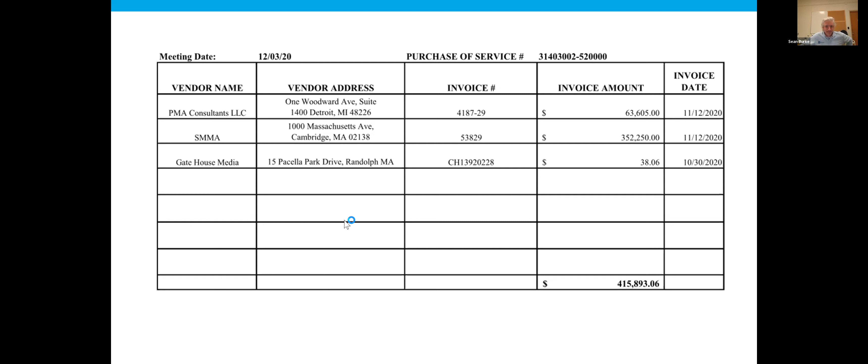Great. Does anyone have any questions for Sean? Hearing none, we'll move on to number 4, phasing review.

Okay, so Lorraine, do you want to go through this or do you want me to? I can open my screen, can people see this? You can open your screen, actually, Chris Racine is on here, so maybe Chris can. Oh, he's even better. Yep, I'll just start, if you don't mind, Chris, just giving an overview.

So after the last meeting, when we went through the construction schedule and we changed the occupancy date from the start of the school year 2022 to the start right after Christmas break of 2023, that changes a little bit of the site phasing.

Obviously, the building will be constructed. As designers and civil engineers, we need to, in the bid package, tell the contractor whereabouts on the site they can work during the various phases. It's critical during a time period when the Memorial Park School will be in occupancy, making sure we maintain parent drop-off, bus drop-off. But then we like to take advantage of what we call the summer slammer, where we'll actually take over the entire site, we'll move the fence, and do work outside of that fence for the 7 to 8 weeks. That is really truly what the summer period is.

And then we pull that fence back in again at the start of the next school year. So these diagrams are part of the bid package. They're critical so that the contractors are aware that they own both the moving of the fence and the work limits, and where they can work and where they can't.

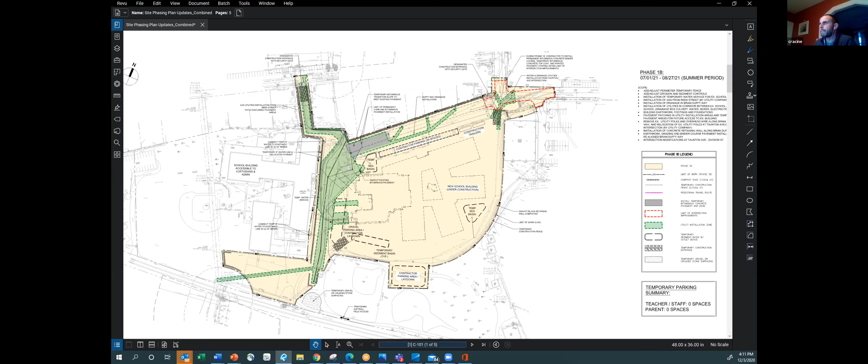It's getting pushed out closer to this north property line, so that roadway will be in place as binder course. The circulation is the same, it's just shifted up a little bit north now where Duffy Way has been completed.

This is one of the conversations we had today with Dr. Cron, just with limited turnaround, keeping the parent drop off inside the site over the striped islands, but keeping the buses out, which is a benefit, I think, to the project.

The Memorial Park School for this coming summer will essentially be offline. So we will need to relocate, for example, Linda Maniglia and her staff to the high school for the summer. We'll need to move Jan Sheehan and her staff to the high school or middle school over the summer so that the construction company has access to the building. The custodians will stay on site, but everyone else will be relocated. Just wanted to make sure everyone knew that.

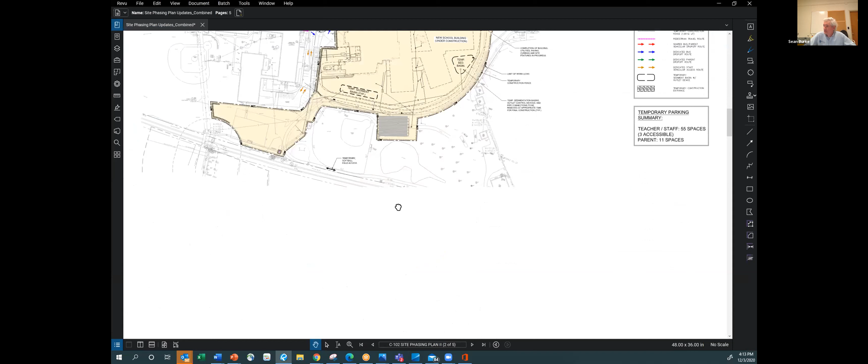So this will be the second summer slammer period. Again, the construction fence gets adjusted to be in front of the school, more space for the contractor. There'll be ongoing, continuing building work, continuing site utilities. They'll be starting to do more of the paving and curbing around the school, the walkways, the plazas, putting in light poles. And starting playground installation in this phase.

This is essentially about 2 months before substantial completion, so the building is weather tight. A lot of work going on inside the building at this point. They'll be tying in the rest of the utilities if they haven't already. And again, at this phase, there'll be limited access to the existing school during that summer.

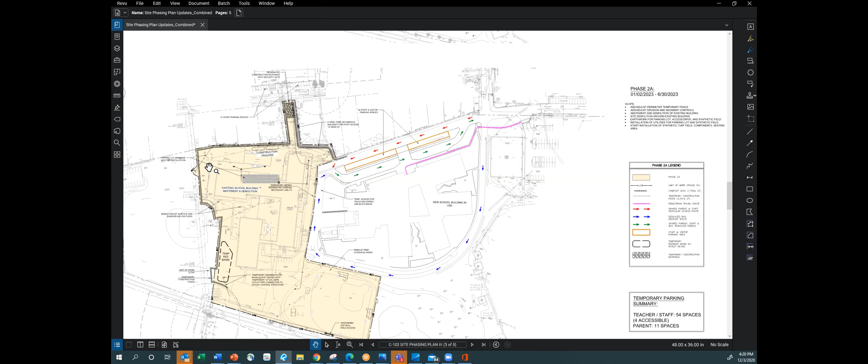Dr. Cron, if Jefferson does move in, we're showing here about 54 spaces for staff. So if the full population is in school, I'd imagine you'll have closer to your full staff at that point. We're just going to have to discuss the ability to use some of the adjacent parking, which I understand is already in high demand in the middle school, high school area.

The tennis courts parking generally is half full at best, but then when parents pick up, it fills up. At regular capacity, right now it's not full, but normally all of those spots are full, there's a line in the aisles.

So I wondered, we might have to discuss seniors driving individually or something to that effect too, because that adds to it—it's not just faculty, it's all the seniors. We might have to really stagger the start times, get a little creative.

Right now, the buses for MP go in, but the parents don't drop off in the same spot. So we'll just have to be aware that buses and cars are all driving together, we'll have to get along.

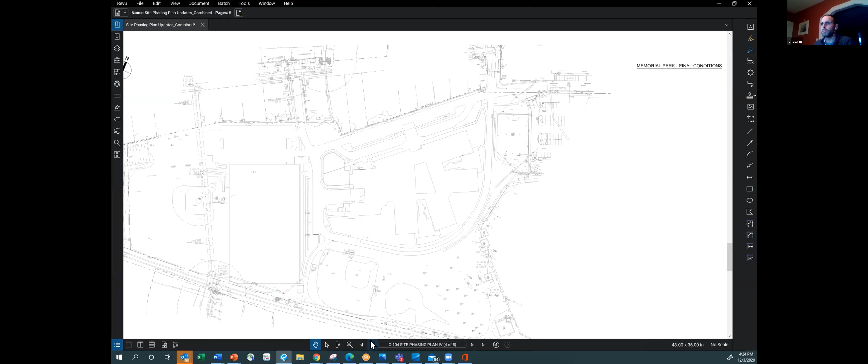I thought we have one more phase. Oh sorry, do we? Before final condition, yep. Oh sorry, pan up. Oh maybe, oh nope—thought we had phase 2B. Go to the next sheet please, Sean. There we go, this is phase 2B at the top of the sheet. Yep, sorry.

Which is the summer slammer. Yep, again. So at this point, the existing building will be down—they would have completed all of the demolition in the last phase. They'll be working on the new synthetic turf field, the large parking lot, the utilities associated with the field and the parking lot, and depending on the actual schedule of the softball field, potentially doing the lighting and new fencing and backstop over there, as well as the north playground at the new school. This is occurring during the summer.

One other thing: the blue hatched area will be all of the pavement that had been done in the previous phases, left as just a binder coat. The preference would be to pave all of the top coat at once, so you have a nice finish and aren't ruining it throughout the rest of the project. So everything, including this intersection out at Division Street and Taunton Ave, will be final paved at that point and final striped.

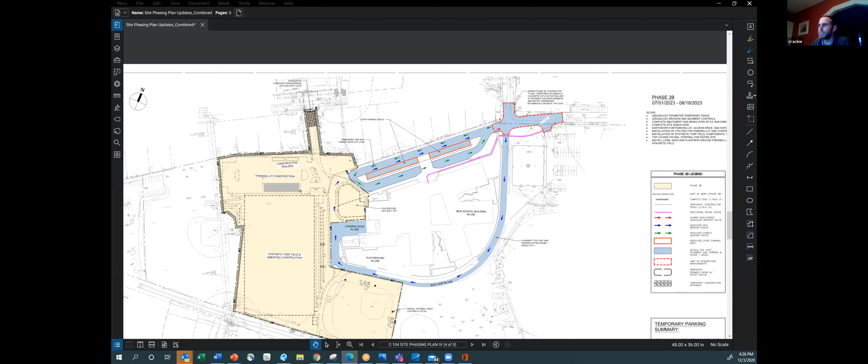And then if you just scroll down to the next slide, that's ultimately the finished product at that point.

So at the end of August 2023, the site should look like this. Yeah, it will look like this.

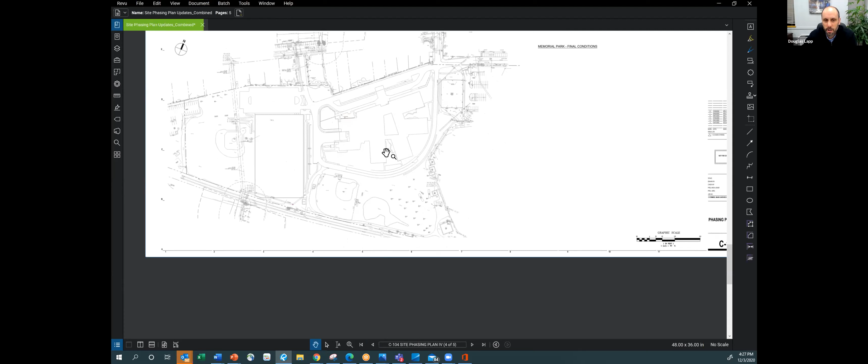Lorraine, can I ask a quick question before you go on to Jefferson? I think it was on your very first page, as it related to the initial road work at Division Street and Taunton Ave. Can you just tell me again what's the time frame? When are we expecting that initial work? Because I plan on sending out the letters to the abutters soon, and I want to be prepared for conversations with them about that. Can you just pan over, Sean?

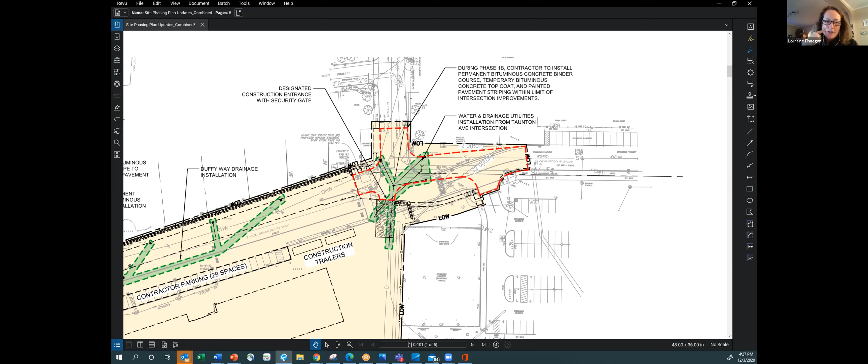That's the first summer, correct? That's the summer of '21. So this is from the end of the school year, basically June 30th of 2021, until the start of the 2021-2022 school year. So that's next summer. All right, okay, that's helpful.

Thank you. Okay, and Doug, we do have a detour plan that we could send to you if it's at all helpful, if you're going to give any information to the abutters about where they're going to be going.

It's mostly going to impact people just trying to get to the high school, and obviously people trying to get through there, correct? Yeah, what I'm most concerned with is the screen you're at right now, the area with the hash marks in red. The property on the right-hand side, they're going to lose a little bit of what they think is their lawn and yard, but it's not going to really impact them that much.

But it's the house on the left side of the intersection where they paved onto town property and are using part of the town road layout as their driveway. They're going to lose some parking. So that's who I'm most concerned with. I just wanted to make sure I knew when I sent it out when the work would happen. So that's helpful, thanks. But if you could send me the detour plan, that'd be good to have too. Sure, thank you.

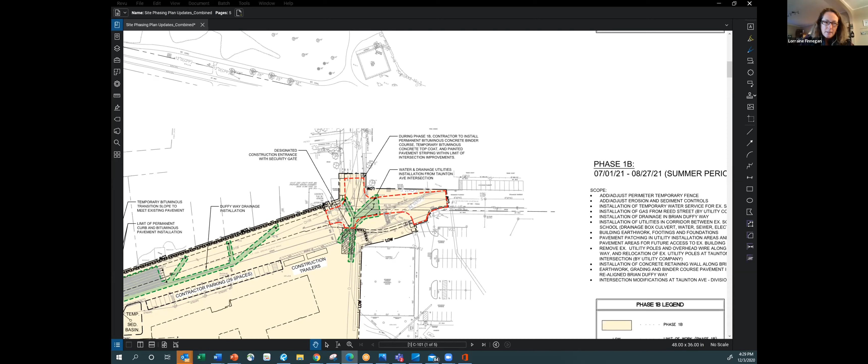All right, so just if you go to the last sheet, Sean, please. And we'll be creating another phase for Jefferson, which is for bringing the topsoil over.

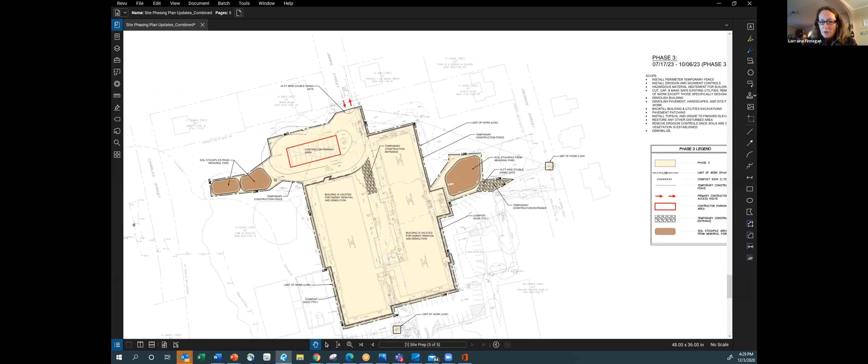So just to explain, this is a net export project. In other words, we are exporting more material from the existing Memorial Park site than we need. It costs money to take soil off and dispose of it. And then at Jefferson, we need soil when we tear down that building. We need materials to fill the holes from the foundations and fill the hole from the basement. So it will cost money of the project to import that material.

So our goal is to export some of that material and stockpile it at Jefferson. We'll stabilize it, fence it, and leave it there so that it's available for use for filling that hole. Therefore you're not paying to dispose of it from one site and paying to import it for another site.

But this is pretty simple. Right now it's planned for starting in the summer of 2023 once the school is empty. If it empties before that, we can accelerate that schedule and move it up. It would take about 3 months between the abatement, the demolition, and some rough grading and seeding of that area. It's very limited, really right up against the building, leaving the existing playground and basketball court and the existing field. But that particular site will be off limits to use that field during that time frame.

So that's another area, Chris, if that field is scheduled, that should be identified. Okay, so this baseball field, the town will not have use of it? Not during the abatement and demolition. It's too tight coming in and out.

Sure. And then the other phase that Lorraine mentioned that we are adding will be just showing that these stockpiles could be coming in as early as the start of the project, once they start work at Memorial Park. So these areas where you see the brown soil stockpiles would be the only areas that would be accessible and fenced in for the contractor.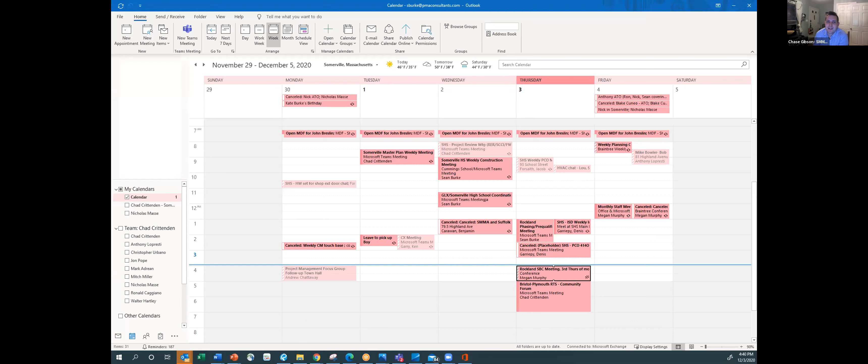Sure, yeah, well thank you. So for those of you that haven't talked enough about COVID, we want to talk a little bit more. With the memo, we decided to lay it out in 3 different areas: talking about the system we've already designed, about operational changes that can be made, and then about capital measures. So just so you're informed, the idea of what we've already designed in the system is that we have 100% outside air for the entire building.

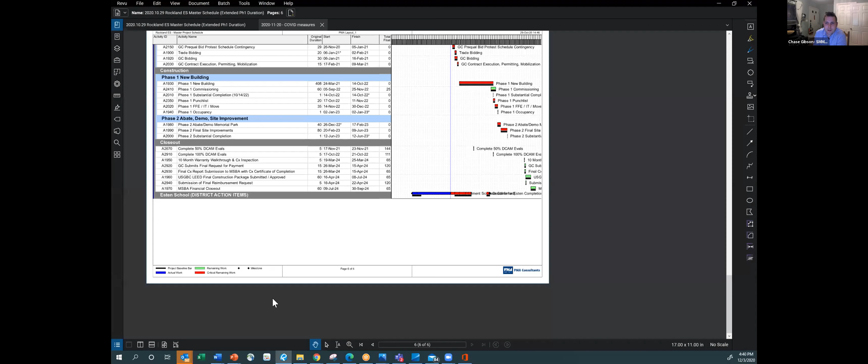This makes it so that all the classrooms are getting air directly from the outside through the energy recovery unit. This is good for not cross-contaminating spaces and keeping things where they are. We've also been using MERV 13 filters, which are what has been recommended by ASHRAE for buildings.

The next aspect is needlepoint ionization. This is something we've added to the energy recovery units as well. This is a technology that puts ions into the air that helps inactivate or kill bacteria and other viruses. At this point, it has not been specifically tested against COVID, but has been tested against other viruses and things of that nature, and shown to be effective.

The next thing we've done is give the classrooms operable windows. This helps give teachers more control of their classrooms and the ability to increase ventilation, weather permitting. We've also positively pressurized spaces. This helps make it so that the air is not cross-contaminating back in, but kind of pushing out of the classrooms and other occupied spaces. We've also added exhaust for the nurses area so that if someone is going into the nurses area, that air isn't going back into other spaces.

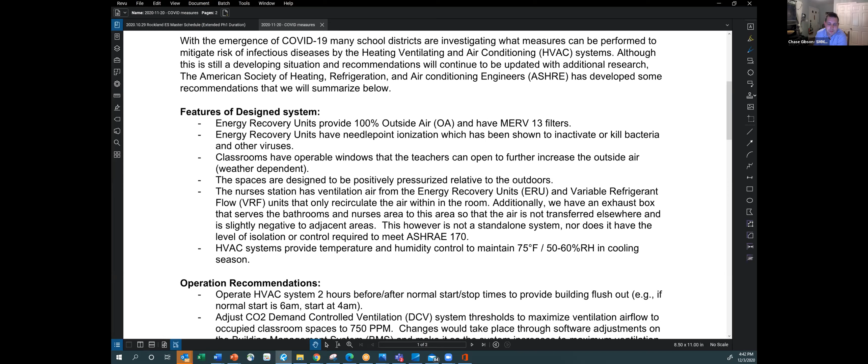The last thing we've designed into the system is standard temperature and humidity control, keeping, especially in the summer, the humidity at 50%. Data has been showing that keeping things in the standard HVAC temperature zones has been helpful. So that's the currently designed system.

Talking about operational recommendations, something that can be done. Now, we aren't putting these in automatically, partially because this building is going to be built 2 years from now, and I think we all hope that the current COVID adventure has come to a close. But we also want you to understand that things may happen in the future that would make it so that putting these operational recommendations into effect could be reasonable.

ASHRAE has been recommending that you start your HVAC system about 2 hours before the building opens and then run it for 2 additional hours. This is just to do an additional purge of the building, and it's called building flush out.

Another one we can do is adjusting the CO2 levels for demand control, which would help push more outside air in faster when rooms are occupied.

The next one is replacing filters more frequently. I chatted with Mark and I know he's already doing things to replace the filters, but this is just a note to replace them when the static pressure is doubled, which will be alarmed in the BMS.

And then just verification and calibration of the equipment. Doing that periodically helps ensure the units are functioning as they were designed.

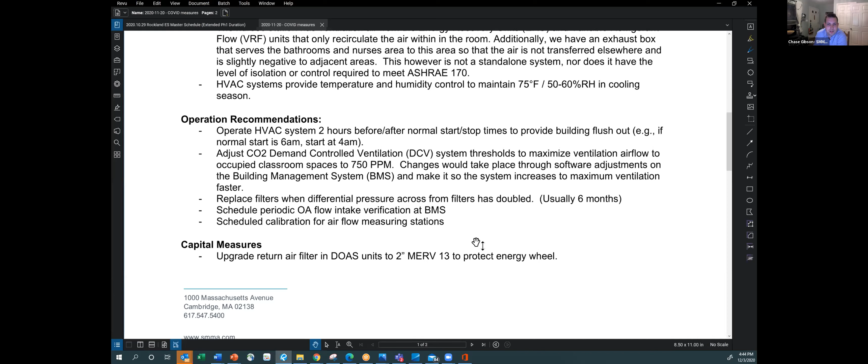The last thing to talk about is the capital measures, which are potential things that have been recommended as options. One is changing the return air filter in the DOAS system, currently using a MERV 8 filter on the return, changing that up to a MERV 13. This would help protect against contaminants, putting them into the filters on the way out.

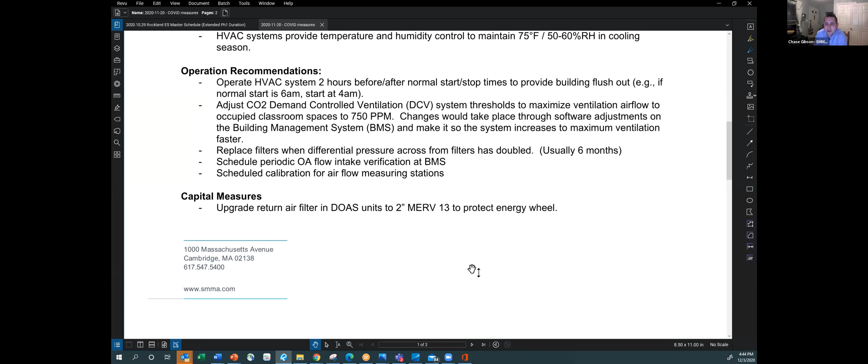The next one, and this is the one I think is most interesting from a capital measure standpoint, is providing UV light in the classrooms. We could do this via the ceiling fans by adding an upper room filtration system. This helps provide UV in the classrooms so that each classroom gets a treatment that kills bacteria and viral items.

Similar to that would be providing portable HEPA and UV units. This is something that could be considered after construction, and you can just roll a unit into a room and provide that kind of filtration.

The next two are substantially more expensive. One is looking at humidification, providing humidification to 40 or 50% in the winter. The other is looking at the nurses suite, making it more like a hospital nurses suite. These both involve substantial space and cost implications.

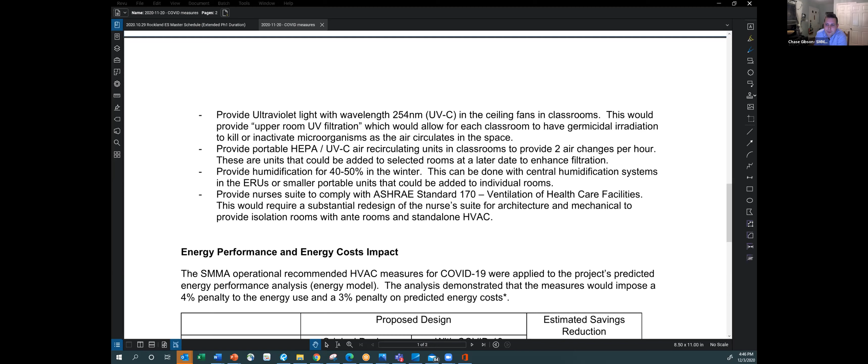The portable HEPA units have one cost estimate in from a manufacturer that says they'll cost about $2,500 each, so however many you would want, it's $2,500 per portable unit. The UVC in the classroom fans looks like it's only about $500 per classroom, which would be about $15,000 for the entire school. And the return air filter is somewhere between a capital measure and an operational thing, looking at probably an additional $50 a month.

So with that, I suppose to address the last part, energy performance.

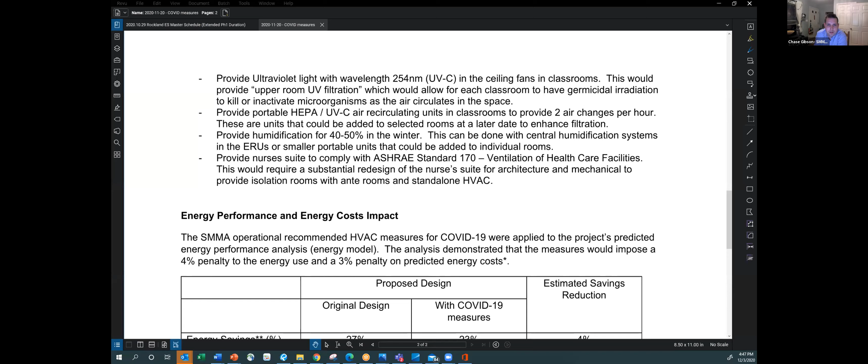Our sustainability team did energy modeling on the building and with the COVID measures, and found that the savings reduction in energy would be 4% and cost related 3%. This is just to say that by running the system longer, it will use more energy, and we want to make sure you're aware of that. The operational things wouldn't be immediately visible, but you'd see it in your utility bills. So with that, does anyone have any questions?

No, I would like to point out that we've had kids in the building now since September in all 5 of our buildings, including 2 that we're going to demolish and close, and we have yet to find evidence of transmission of the COVID virus within school. So I'm assuming that with a brand new building, similar to the middle school and high school, but especially the middle school, we're already going to be looking at an HVAC system and air quality far higher than we have right now in even our newest schools. I just want to set the table with that.

Thank you, Alan. That is correct. This system will be far beneficial above what you experienced today in Jefferson, Memorial, Esten, and even what you have at the middle and high school. We just felt as designers, there's so much conversation in the design community about what our built environment can do, and are there ways we can help, that we felt it was important to bring this to your attention. As Chase mentioned, there are operational changes you can make with no capital improvements, but if there are any capital changes you'd like made, we'd need to include those within the bid documents.

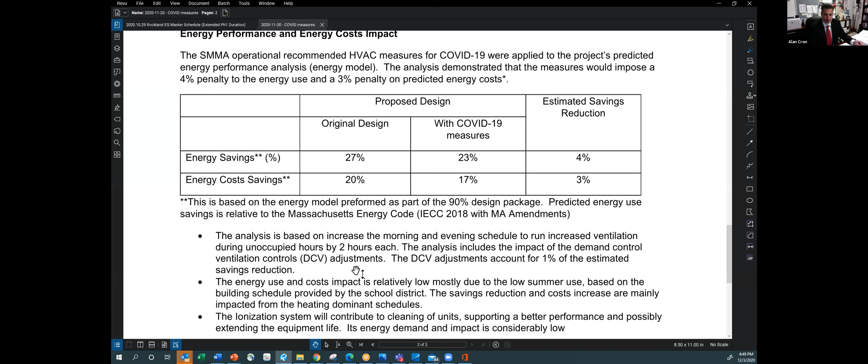Okay, hearing nothing, thank you. I just have a comment. I just think that with the operational recommendations and the design system already in place, I don't think it's necessary to do capital improvements at this point. Like Alan said, we've had no COVID cases, knock on wood, in the school, and the air filters and air system is not that great compared to the others. This is going to be so much better, but obviously I'm not an expert on this, so I don't know if Mark or anybody has a comment about it.

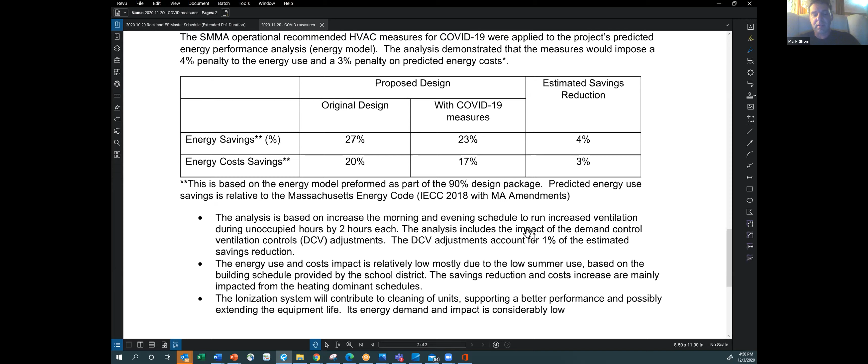Yeah, if you look at the very beginning, when they talk about the features, the design of the system is already pretty well designed, obviously. You're all correct, it is a much improved system than what we have right now. Everything else that's recommended is almost like hospital grade, if we're doing something more intended for a hospital. By far, we have recommendations on how to operate the system, and the actual system itself, operable windows, ceiling fans. It's definitely a much improved system. I think we'll be totally 100% fine.

Great. Okay, hearing nothing, shall we move on? Sure. Thank you, Chase.

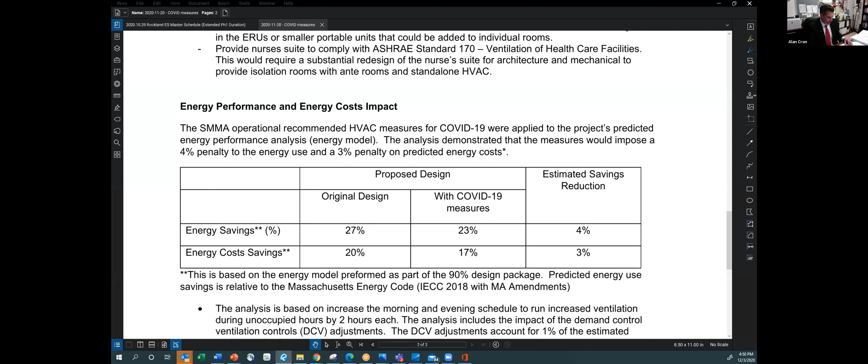Number 8, final interior colors and carpet selection. As we work through design and continue to evolve the design, the environmental graphic design, and we start to hone in on materials, one thing our interior designers said to everyone during focus groups is that as you move through, carpets get discontinued, flooring types get discontinued, so we're always going to be looking back at that. We knew that when we left off with the second interior focus group meeting, there was still some need to look at the carpet in particular. So I have a very short slide deck that I'm willing to share, and Jennifer Badershall is here with us to take you through what they are.

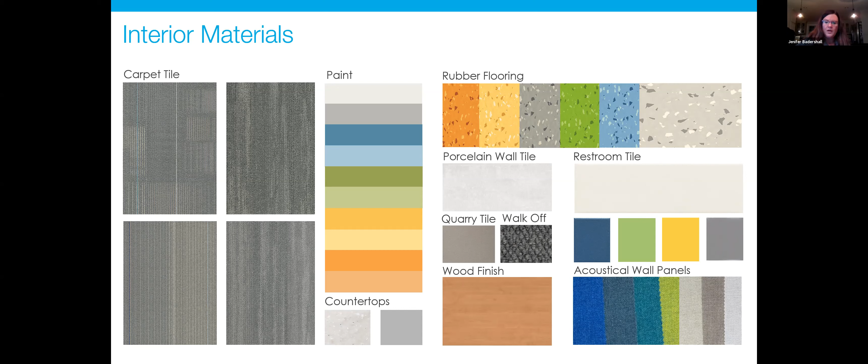Just a reminder of what the media center looks like and the carpet that we're proposing there, which is a medium gray carpet that is linear.

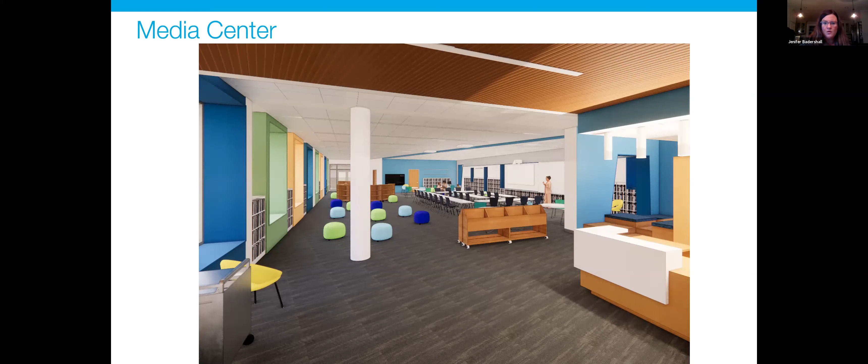And that's it for the interior design update. Very nice, yeah, it looks great. I know the carpet's a little simpler, but I think it will be timeless compared to the design carpet. Great, thank you.

Any other comments or questions? I agree with Emily, I think it looks great and it will last long. It's sort of less mesmerizing, it looks more neutral. So thank you for taking the time. Thank you.

Okay, finally, next steps. Sean, anything you want us to be thinking about before the next meeting? Well, one is we should probably figure out a schedule for the next meeting. I know we have the holidays coming up and it's going to get a little bit crazy with people traveling, and maybe not traveling, but trying to take some time with their families.

As far as our process goes, next week we're going to respond to those 90% comments to the MSBA. We're going to submit probably December 14th, December 15th, sometime around then, our 100% to the MSBA. There is no review period with them, it's just a final submission for their records.